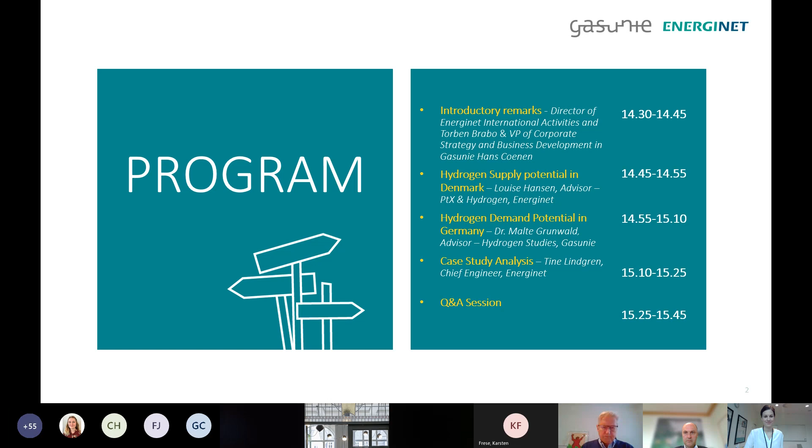All right, so we have now come to the first part of the session where we go through the findings from the study that we conducted between Gasunie and Energinet.

And the first session is about the hydrogen supply potential in Denmark. And I will say a little bit about that.

When you talk about renewable hydrogen production, it's very linked to offshore wind energy generation, and that's often what you hear when you talk about Denmark's potential to become a key supplier of hydrogen in Europe. And this is not without reason, because we have quite ambitious goals for offshore wind development. Latest, the government announced a climate strategy for an additional 6 gigawatt of offshore wind by 2030, and a large share of that wind is actually to be built on energy islands.

One being an artificial energy island in the North Sea, and the other developed around the physical island of Bornholm. Until 2030, the goal is to build around 3 gigawatt in the North Sea, but building the island so that it's scalable to 10 gigawatt for later possible investments. So there's a story around offshore wind development, closely linked to renewable hydrogen production.

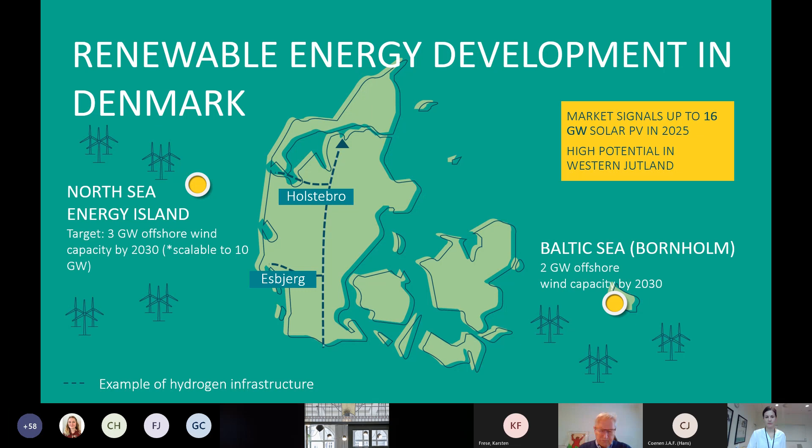But the thing is, as we are moving towards more renewable energy generation, we will have more times where there is an excess supply. In other words, there will be much more hours where production surpasses classical consumption. And since in these hours the prices of electricity are often so low that it is not economical to produce, this could be curtailed. But in order to utilize this excess production of wind, we need flexible consumption. This could be power-to-X conversion into hydrogen, or other flexible consumption products.

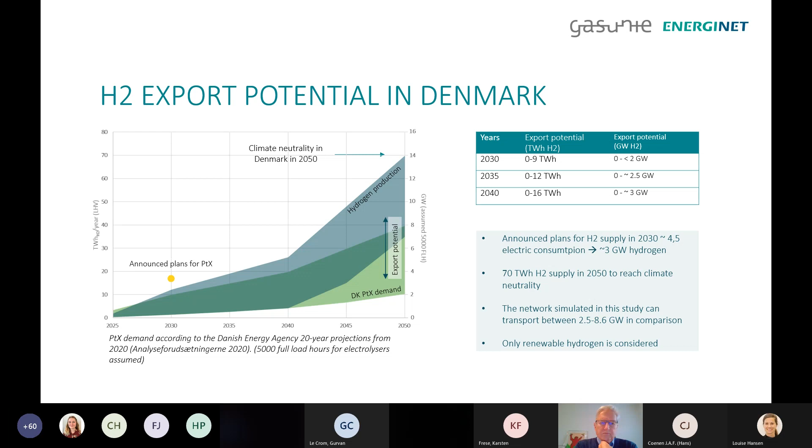Thank you, Louise. Before I forget, I would like to thank you and your colleagues at Energinet for the very good cooperation, for the great cooperation on this issue.

Hydrogen demand in Germany - here the word potential is very important, as Louise said, because we have a high bandwidth of hydrogen that can be used in the German market, and therefore there is no clear answer for what will be used, but the potential is the right word.

We can directly move to the first slide, maybe. If this works. We had agreed that Louise should share further on these slides, and I hope she will do that. Yes, at the moment I don't see any slides being shared. Perhaps you could share the slides, Louise. I can turn it on. A few seconds, and somehow I missed the presentation. It's back now, I see.

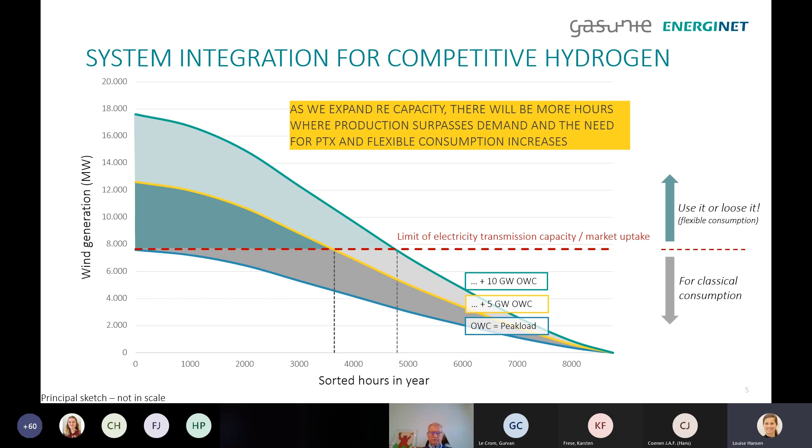Following a Supreme Court decision months ago - if this is called Supreme Court in Germany - the climate targets have been raised to 65% reduction by 2030 and full decarbonization by 2045. Therefore, these are very ambitious targets, and they are not in balance with the plans.

We do not have a master plan behind this energy transition - how the energy system should look in 2050, which is somehow missing for us as infrastructure companies. We would like to have something like that in the background, but we at least have two clear decisions, cornerstones of the energy system.

These cornerstones for the energy system are the conclusions that we need renewable gases in the system to fulfill decarbonization. The main driver is that Germany will not be energy independent in the future - it cannot be energy independent. We do not have the resources to create enough energy from renewables to be energy independent.

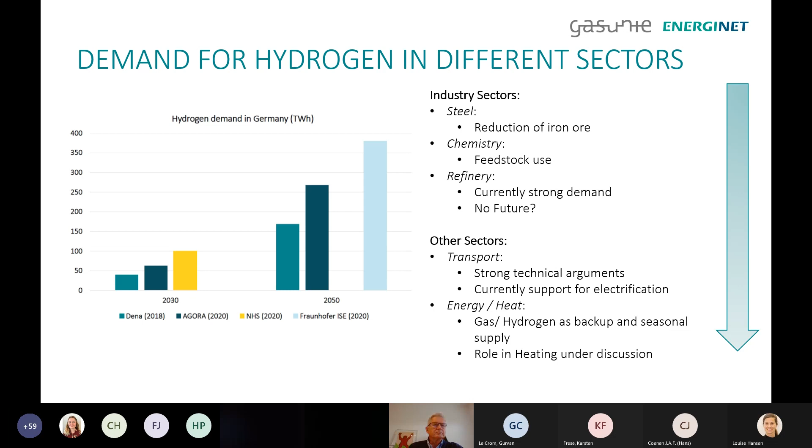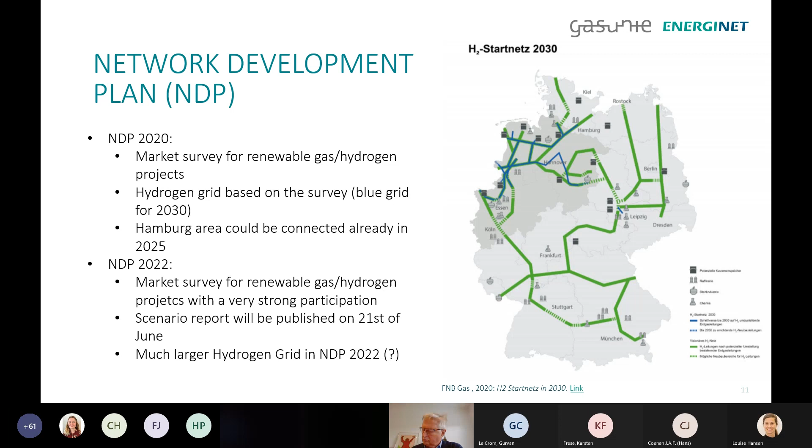Thank you, Malte. Yes, I will give a presentation of the technical work we have done together with Energinet and Gasunie. I will present the transport corridors, some of our key assumptions and scenario results, together with some learning points. I can say we are still learning on this hydrogen transport system. So going to the next slide.

We looked at 2 alternative routes from Denmark to Germany, as Louise mentioned, one starting in Esbjerg and one starting in Holstebro. They both reach south of Hamburg in an area with a small location called Heidenau, a region where there's a potential demand for hydrogen and where it's possible also to connect to a future hydrogen grid system supplying additional demand centers in Germany.

The 2 starting points shall be taken as possible landing points for energy from the North Sea energy islands, and not as fixed locations. The actual location, if we ever build this system, will be dependent on the market needs.

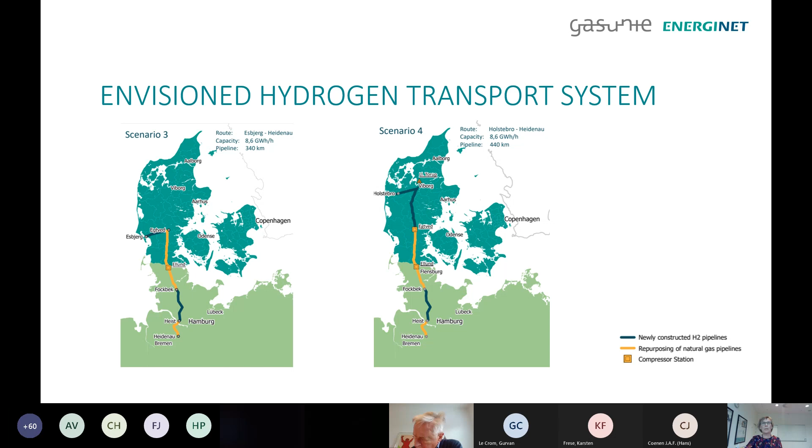On the technical side, it's the conversion of methane gas pipeline is possible - that's the assumption we have made. And also that the converted pipelines can be operated at the same maximum allowable pressure as we can for natural gas pipelines. Both of those assumptions are critical for both the capacity of a transport system, but also for the cost of the transport system. Both assumptions, I would say, are today generally applied when we look at European studies, but there's very little experience to verify that it is actually possible.

In Gasunie, a few years ago, they converted a pipeline in Netherlands and gained experience from that. And in Energinet, this spring we initiated a technical study to find out if and how pipeline from Egtved to the border can be converted and at what pressure it can be operated. We really look forward to obtaining the result of this study.

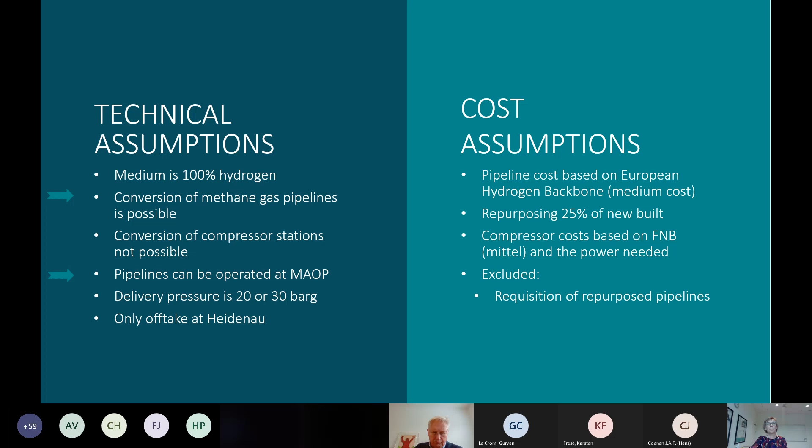And if we then increase the capacity, we can add compressor stations on the way and reach a fully developed system with indicative cost of 670 to 875 million euros.

The operational costs are not shown here. We have some indication in the report, but they will depend on the capacity being transported in the pipeline system, and not the theoretical capacities.

I would like to make two comments here because that's also some of the learnings we have done. If you look at scenario 2 and 3, it's the same route from Esbjerg to Heidenau, but we have a different location of the compressor stations.

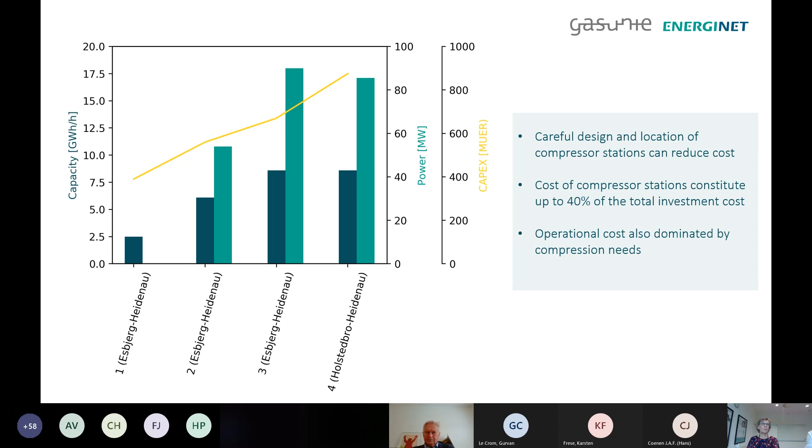Yes, good question, but I think I was a bit too fast on this demand studies. Maybe we switch to the demand studies, because the statement is not that the demand is reduced to the targets, because all of the studies we show are 95% or 100%, therefore deep decarbonization scenarios. Therefore, it's not that the demand of energy which needs to be imported to Germany is depending on the target, but it's depending on the overall assumption you have in the study.

Therefore, we do not yet have a study which has fully taken into account the speed up of the decarbonization. One exception is maybe Agora. They have a fast track scenario in that study as well, but this is something which is coming up in the near future.

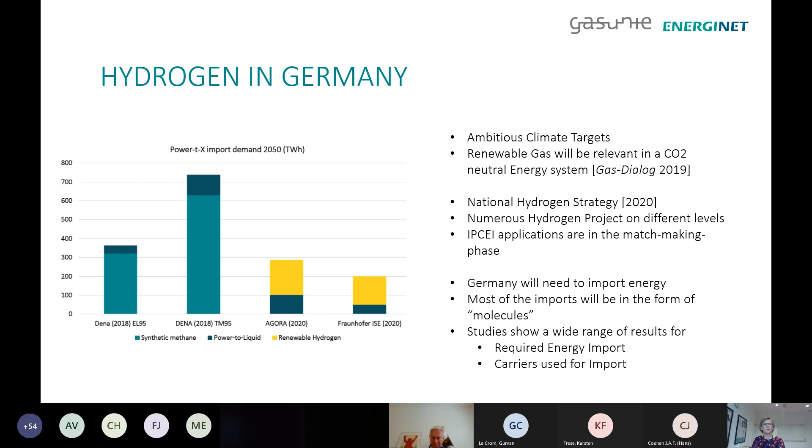Thanks, Malte. Another question, more technically related: what technical work was done to support that conversion is technically feasible, and what has to be done, for instance, safety measures, to make this happen? Tine, perhaps you could answer that question.

Yeah, I can try to answer it. As I mentioned in my presentation, we have made the assumption that conversion repurposing is possible. Energinet has initiated a consultant study this spring, to deep dive into the quality of the current pipeline, the welding methods, the coating, everything, to make a conclusion on whether the pipeline can be converted safely and at what operating pressure it can be operated with hydrogen.

So we do not have a clear answer at the moment. We expect the pipelines can be converted, because we know the steel quality, and that is generally accepted to be possible to repurpose. But the interesting question is, at what pressure can it be operated? If it's very low pressure, it might not be too interesting to repurpose it, but we are still waiting for those results.